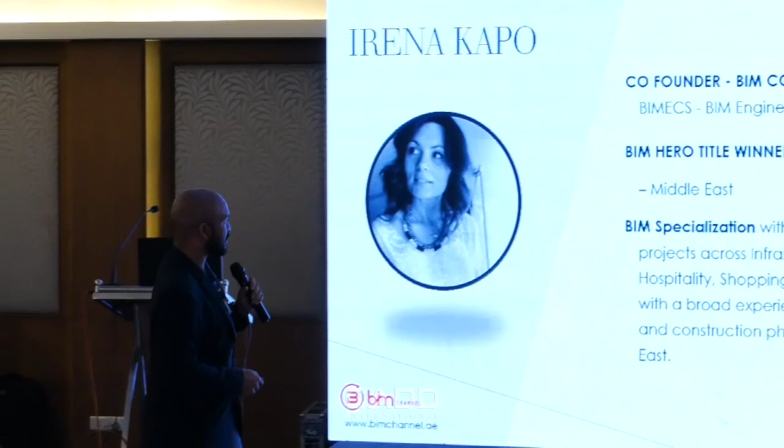As I asked you, what is the concept of BIM? Ma'am clearly explained the practical side of BIM, but still, if you can go for a kind of small definition, everything should have a definition, right? Many people think that BIM is kind of a software. How many of you still think that BIM is a software? Okay, anybody else?

No? Okay, so you know there is a system, right? I have to tell you, this BIM is actually a system, or you can say a process, in order to digitally represent the complete built asset. Built asset means whatever you are going to build - it can be an object, to an extent, to an infrastructure. So BIM doesn't mean it's only focusing on a building; it's connected to infrastructure also. This is one of the big things you have to understand from the beginning. It is a system from the point where the client discusses, the concept stage, concept design happens, detailed design happens, construction starts, as-built happening, handing over, and even after handing over, how the services are managed. All those things are managed through this system called BIM. So please keep in mind, BIM is not a software - it's a holistic process of creating and managing information for a built asset. That is the point. Any questions?

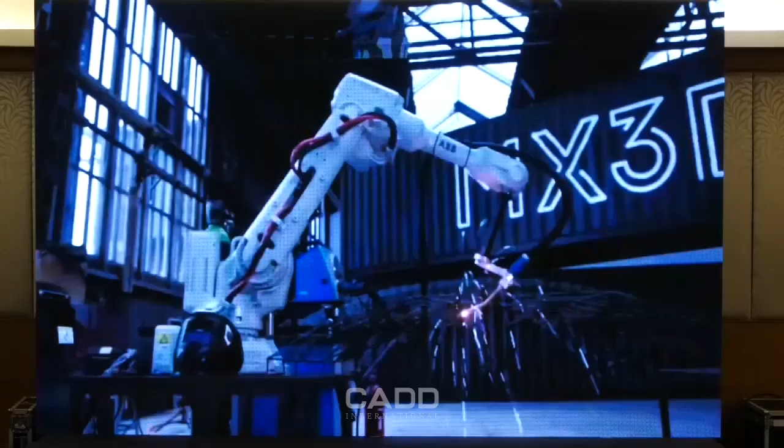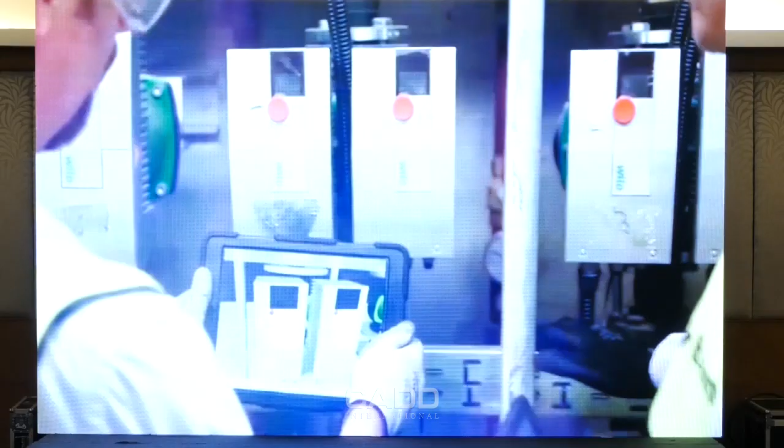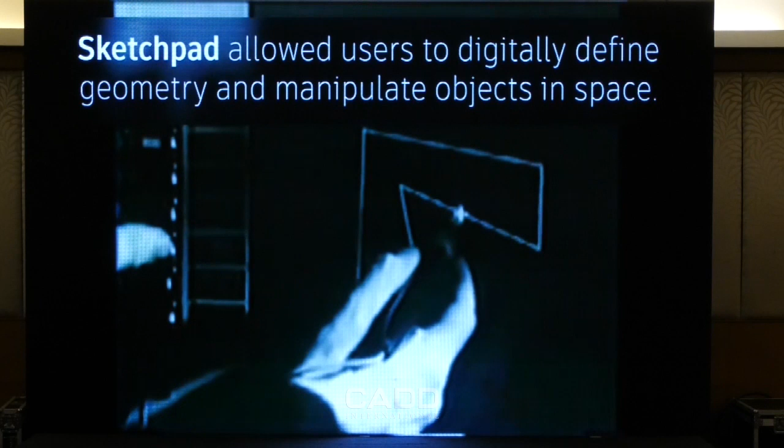So what's the technology behind many of the iconic architectural structures being built today? It's a process called building information modeling. BIM is a 3D modeling process that is changing the way people plan, design, construct, and operate buildings and infrastructure around the globe. As early as the 1960s, computer pioneers realized the demand for flexible digital building models. The breakthrough came in 1963 when Ivan Sutherland developed Sketchpad. This rudimentary application allowed users to define geometry and manipulate objects in space with only the help of an electronic stylus on a computer screen.

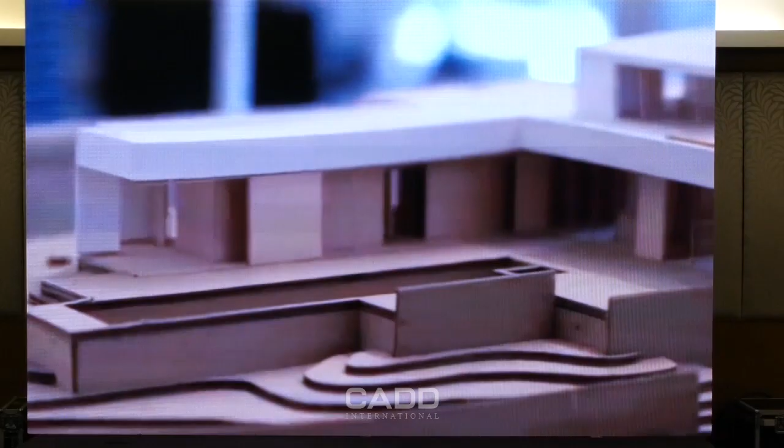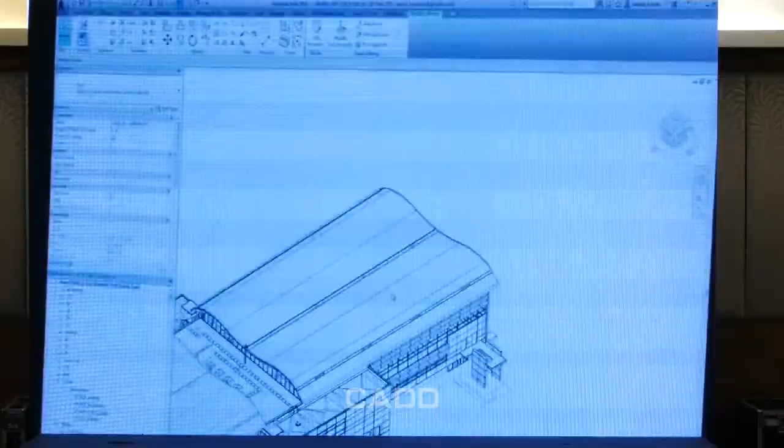However, these early predecessors built models without data on functional performance characteristics, meaning that without information on how buildings work, they were rather superficial implementations. In 1984, these BIM forerunners became available for use on personal computers. But it wasn't until 1986, when Robert Aish coined the phrase building modeling, that early programs were first used on large and complex projects, such as the renovation of a Heathrow Airport terminal. In 1993, the Lawrence Berkeley National Lab's development of Building Design Advisor paved the way for systems providing performance data on how buildings and their components function.

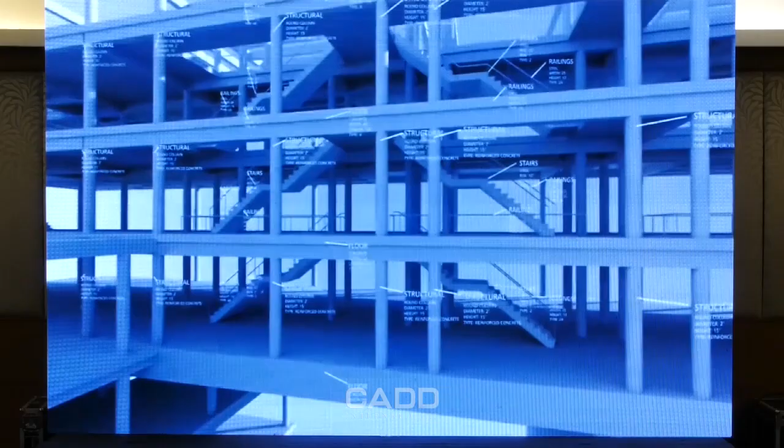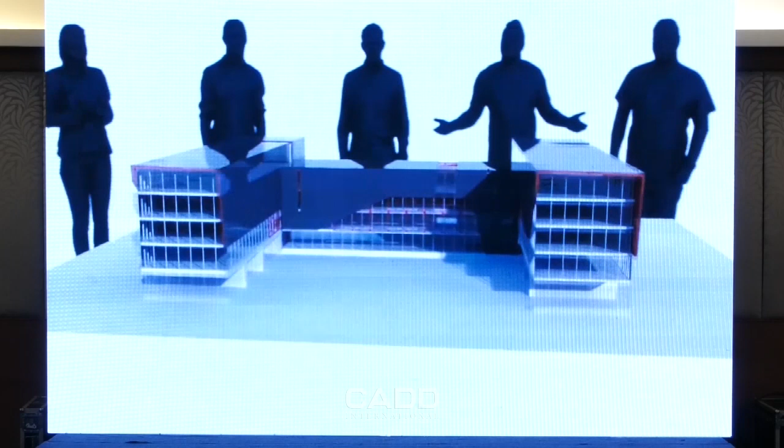By the late 1990s and early 2000s, the contemporary outline of BIM had started to crystallize. Objects and shapes had fully embedded metadata and were able to understand their relationship with each other and the building as a whole. 2004 was a huge year for BIM. For the first time, designers, builders, engineers, and owners could all work collaboratively on one centralized, dynamically updated model. For example, if a designer made a change to the model, the project's construction shopping list automatically changed too, such as the number and size of windows.

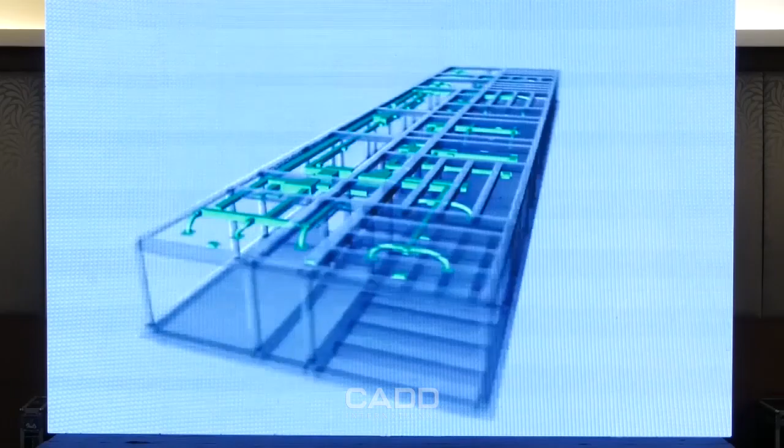2008, four years later, parametric modeling also took a step forward with an avalanche of design outputs, giving users even greater control over their project decisions. Meanwhile, laser scanning and reality capture filled BIM models with precise, abundant data, saving time in project preparations, and clash detection made it possible to automatically locate on-site clashes, such as ductwork running through beams, and prevent expensive change orders. With help from clash detection, engineers for the China Zun Tower in Beijing caught thousands of issues in the BIM model. It reduced passive change orders by 80% compared to other similar projects.

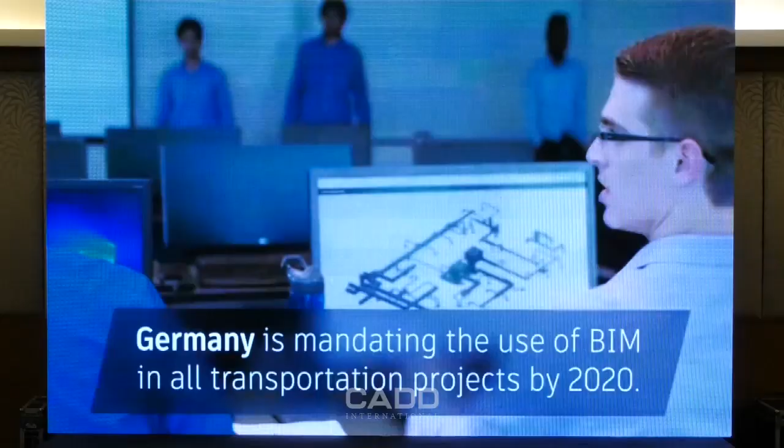The indisputable efficiencies in time, material, and cost driven by BIM meant that in 2016, the UK became the leader in legally mandating that all public-funded building projects must use BIM. And other countries are soon following suit. By 2020, Germany is mandating BIM for all transportation projects. With BIM now in the cloud, teams can collaborate on the same model from all over the world, providing great efficiencies. In the near future, BIM and GIS data will merge into one model, helping designers make crucial decisions based on the precise geographic location.

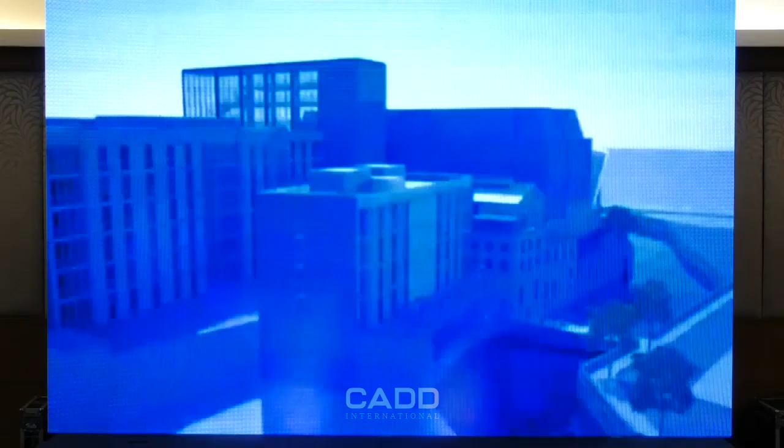As 3D modeling technology advances and is more commercially accessible, the BIM process is becoming more and more integrated with building the wider world, promising a richer, more collaborative experience for users designing and building the spaces we live and work in.

So this is a quick, short history of how we reached now. What we need to understand is that through all these videos, we have seen many technologies, many systems come up. And now everywhere the issue or problem is how to solve the issues - we can call it a mitigation strategy that needs to be planned. Even whatever role you are playing in a project, sometimes you may be a lead architect, sometimes you may be a project manager, sometimes anything.

Whatever role you are playing, you should have a proper mitigation strategy. That is the role of a proper manager in this BIM system. So there arises the level of a BIM manager for a project, which is the highest position we can assume in a BIM-based project.

What I have to tell you is that even in manual drafting we have Sketchpad, AutoCAD, and even ArchiCAD, Revit, and some 3D modeling software like SketchUp, 3ds Max. So I have a question: do we have to connect 3ds Max and SketchUp with BIM? Yes? Why? Can somebody give a mic? What is the role of SketchUp and 3ds Max in BIM? Because normally we know these are just 3D modeling software, right?

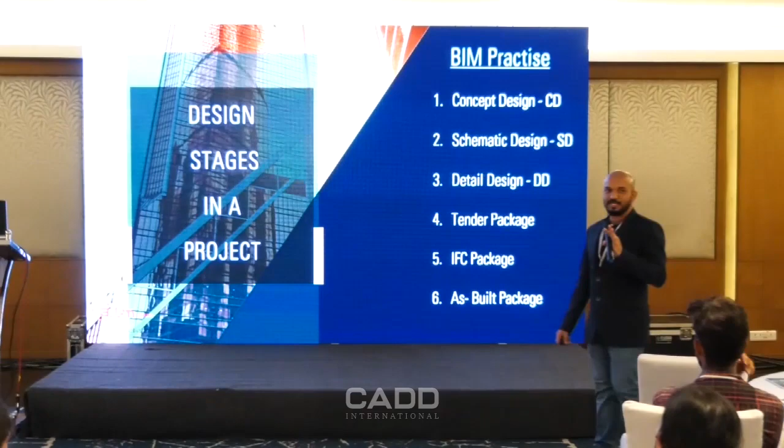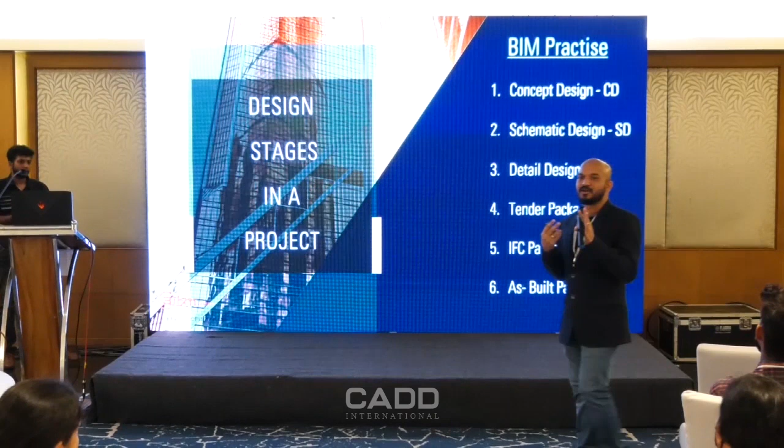So even this is what being practiced in the projects. Most projects, I guess, this is the way in real projects as well. So the point is, concept design stage is the first. Say for example, 100 days is the stage of the project. Say for example, first 20 days are given for concept design.

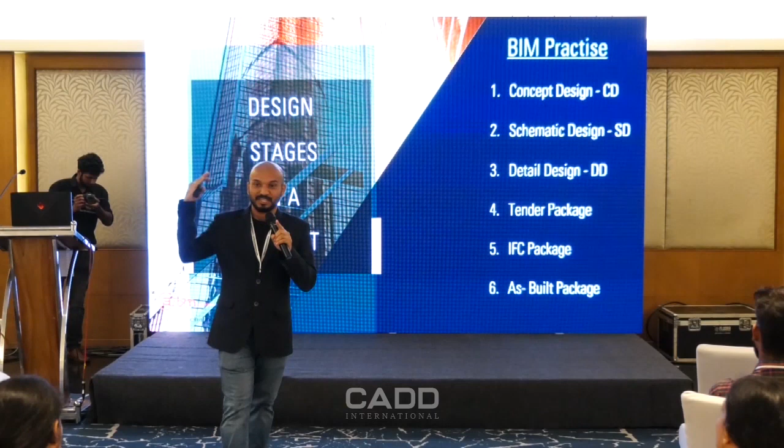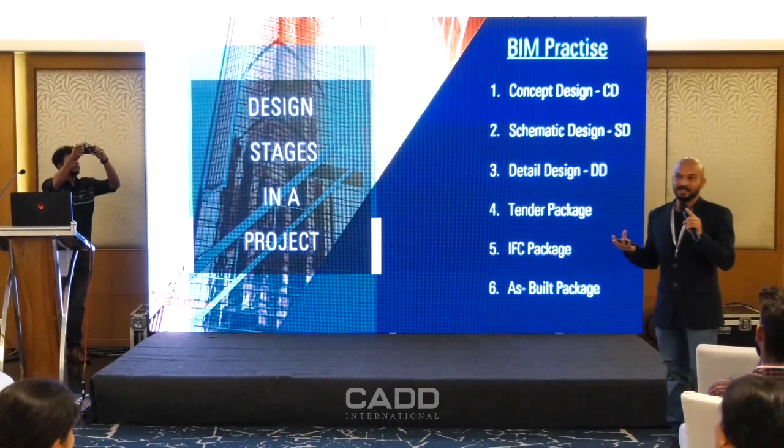So that concept design is not only the role of an architect. That is the reality, what you can say. Even in the concept stage, we need to bring the structural team, MEP guys, lighting, kitchen equipment people, everybody should be on board. And they should prepare a proper plan at the design stage itself. Because in a massive project, it is not only lying in the hands of an architect. Obviously concept is important, services are important, as we see, even the form should follow the function, right? So the functionality is the important thing here. So from the concept stage, everybody will be coming onto the board.

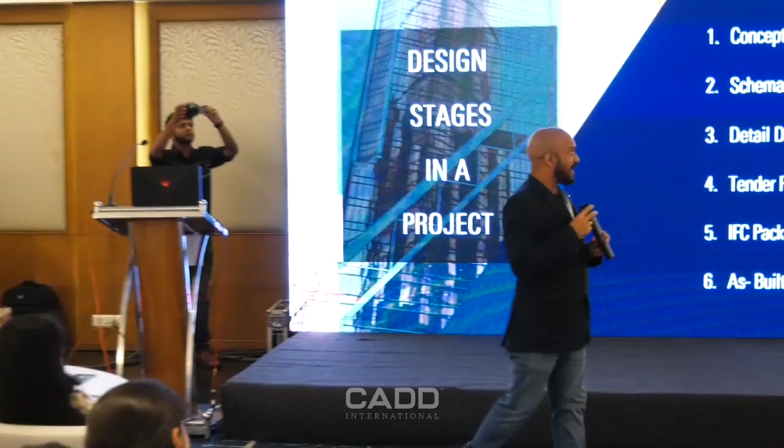And once the concept is approved from the client, obviously for big projects you will be having two phases, like 50% SD and 100% SD. So there we have to deliver the projects based upon the basic information. Say for example, the concept model, it should not be in SketchUp. It should be in Revit.

Or at least the base framework should be in SketchUp. That is totally fine. At the time of discussions with the PowerPoint presentation to the clients, it's okay. But when it comes to the detailed presentations, we need to deliver that in Revit only. So that is the importance of Revit software.

So even that same Revit is being linked on a live basis with MEP and structure teams through the cloud platform called Autodesk BIM Collaborate Pro. It was older, it was BIM 360. Now it is Autodesk BIM Collaborate Pro. We call it ABC Pro. We have planned for a live demonstration in the next session for that one.

The point is, when it comes to concept design, the client will be also there in this BIM 360 platform or BIM Collaborate Pro platform. So even the client can see what is happening in the design, in all the cases. And also the client side will be having the BIM team. So what they will do is just cross-verify what the consultants are delivering.

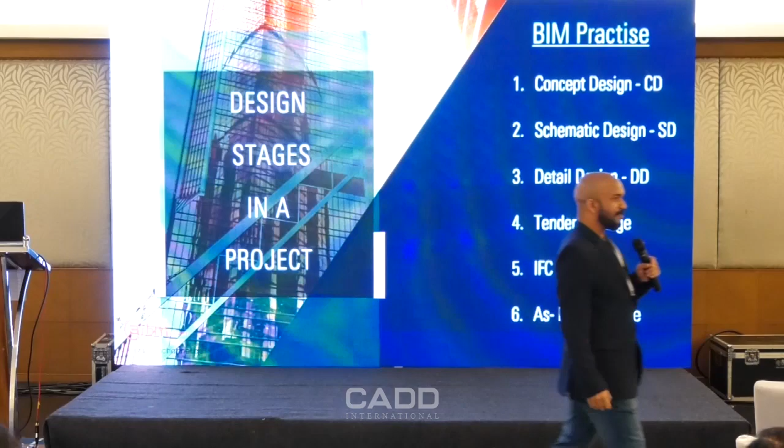Preliminary analysis based on structural as well as general operational analysis is carried out at the schematic stage, and the landscape team adds in, landscape services come in, and entire collaboration happens there. So in the schematic stage, everyone should deliver the deliverables - architects, structural engineers, MEP engineers, and even specialty equipment teams should come into action there.

And that comes in 50% and 100% stages, and you have to submit both drawings and BIM models. So I have a question - we know BIM is actually a model, right? So what is the relevance of drawings now, because everything is available in the Revit model. Is drawings necessary or not?

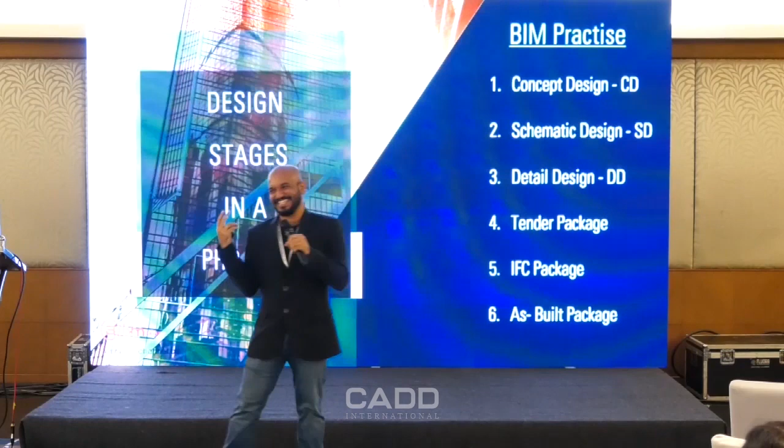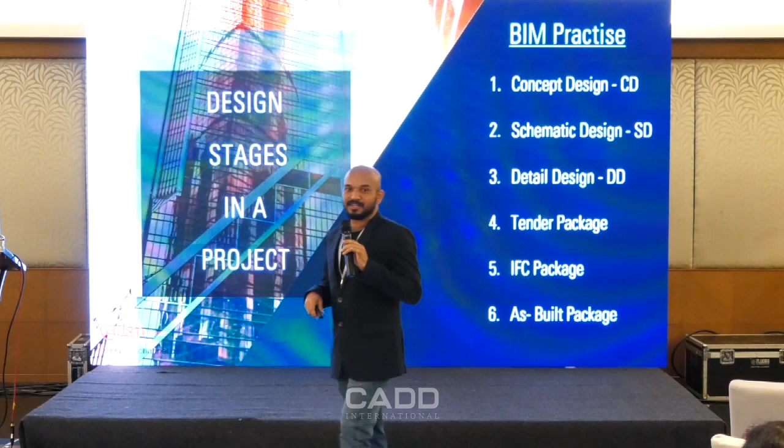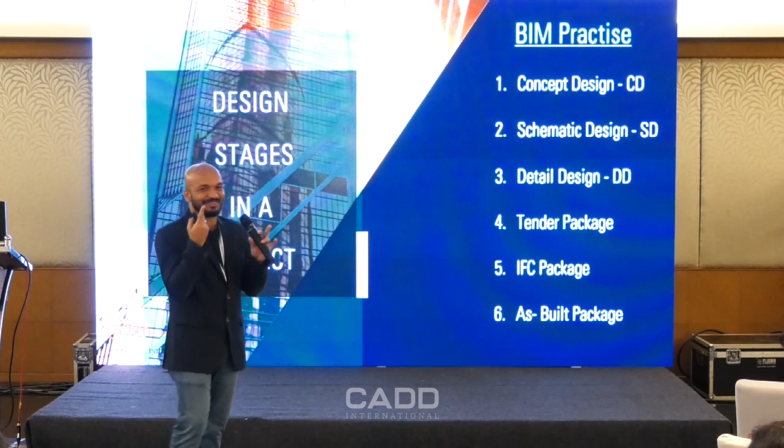Obviously, you will kill me. Drawings are very important, because even though we do the Revit model as the deliverable, we need to get the drawings. Execution is the most challenging part, so for execution we need the drawings. Nobody will go into the Revit model directly - that's not practical. So the point is, in the BIM system, BIM insists you develop the model first and then extract the 2D drawing.

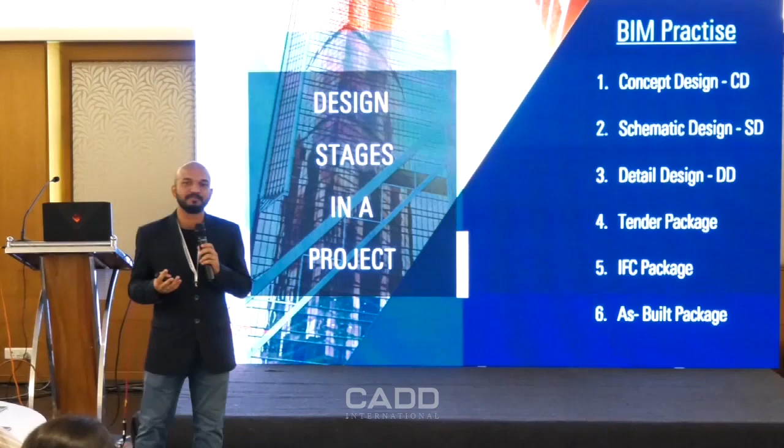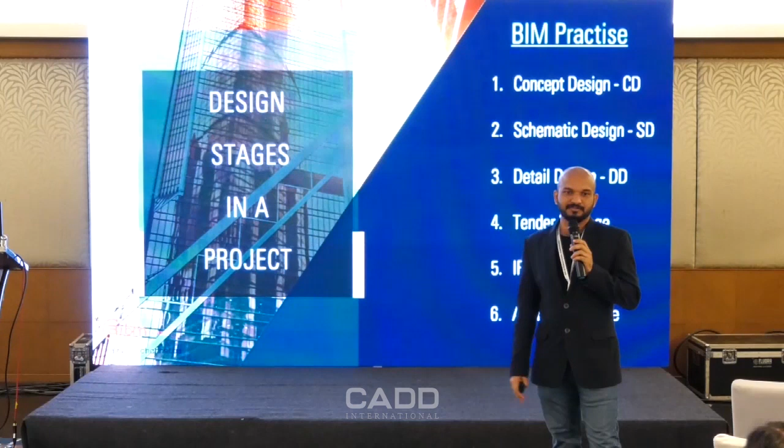But in 90% of projects, it's happening in reverse. Why? Because most companies have very limited Revit experts. So in that scenario, the company fails to deliver on the date - submission delays happen, and the client will pressurize you, so you need to find any way to get the deliverables done on time.

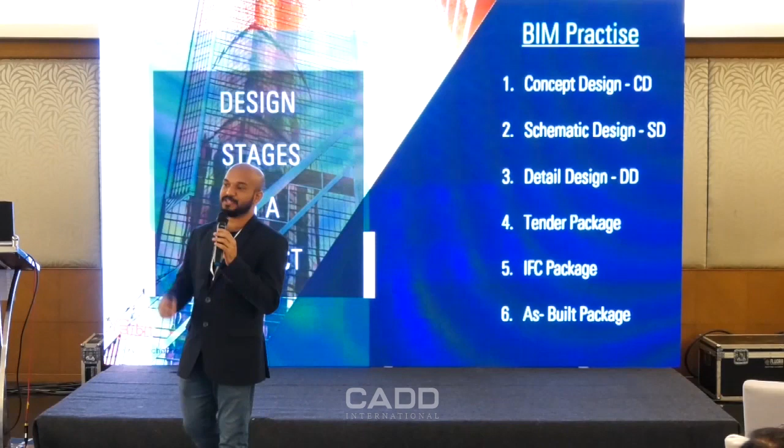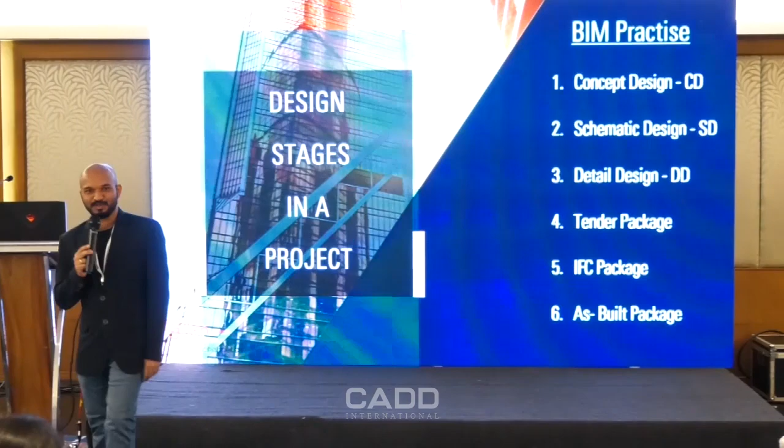So even you will follow AutoCAD. Most people have 20-plus years of experience, so they're fluent in AutoCAD, but for people inexperienced in Revit, it takes a little more time - errors will be there, and managing those errors is quite complicated. That's why most architects, not only architects but most professionals, have a point that Revit is a waste. I know this will also be a controversy, but that's the reality.

Even in the project I'm handling now, we have a discussion - SD 100% is happening now, this November is the coming submission date. So in that one, the ID team is coming into action - the interior designing team has come on board. ID BIM modeling and ID BIM drawings have a big difference. You can draft anything, create sections, create all those 2D drafts.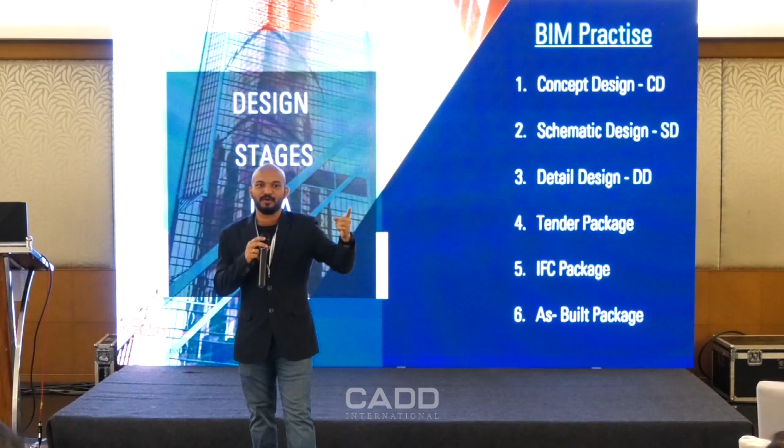That's very easy, and manipulation is easy with AutoCAD - you can do anything. But in Revit that's not as easy, because in Revit we call it 'change anywhere as change everywhere.' If you change here in the plan view, it will affect the elevation, section, 3D everywhere. But in the drawing, that's not the case - if you change the drawing, it only affects that PDF paper since it's already 2D, so it won't affect your other design. That's what we need to understand.

That's where the role of BIM experts comes in - we have to think a little bit outside the box with Revit. You've heard about a plugin called Dynamo. Dynamo is a visual programming plugin which we use to make such activities much simpler. So just Revit alone will not work.

You have to find solutions by using additional external plugins like Dynamo. Dynamo is one of the best tools, and Python is the base language of Dynamo. Even though it's completely visual programming, you still have to think logically to get to a result, and that's the scenario with Dynamo. All those things come into action.

That's what I'm telling you, even ID teams find it very difficult to deliver the BIM SD 100% model. Why? Because even for ID, for example, if you have claddings, the fixation methods are totally different. Sometimes you'll have metal studs, sometimes plastering, sometimes pasted cladding. Different methods exist for installation.

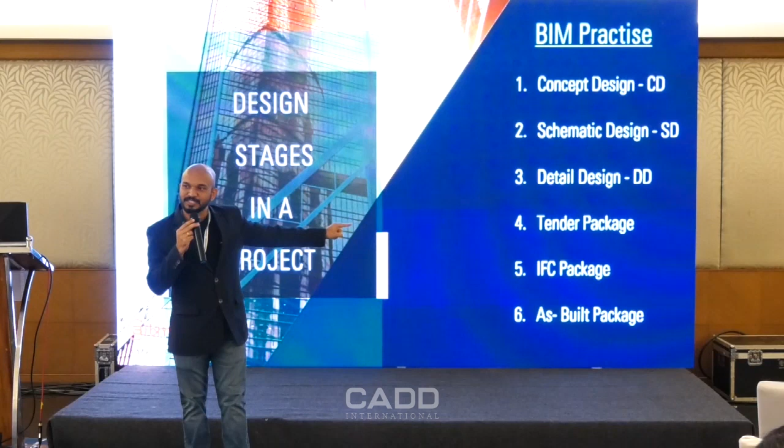So even at SD, or in the Revit model, the client expects all those details. As mentioned, for tendering, I specified number 4 as the tender package. When it comes to the tender package, it's very messy. You have to refer to the model from the previous stages up to tender, and all those things are calculated at that level. That is the point.

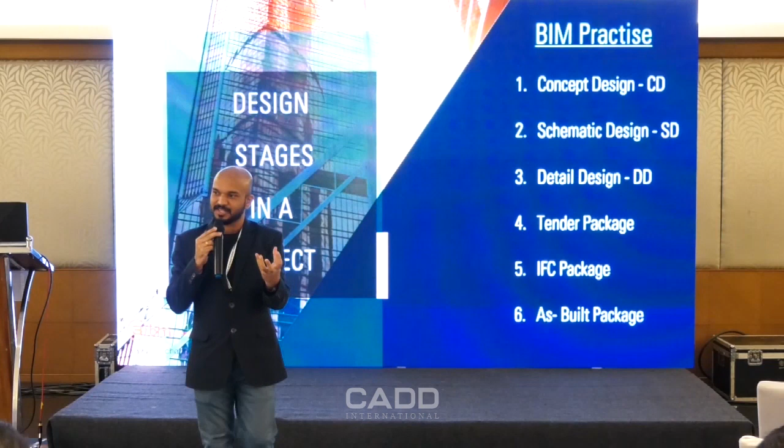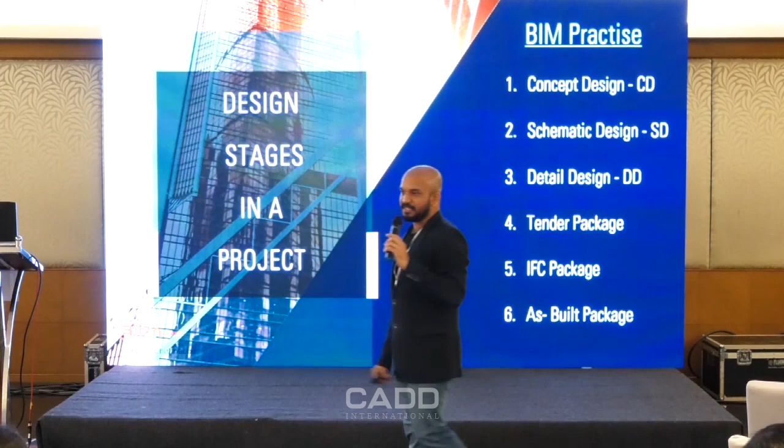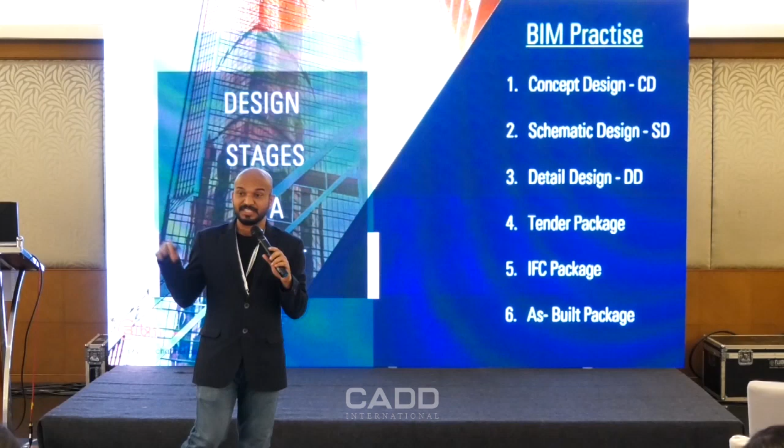So that is the point. Now schematic design comes in that way, and then detailing comes. Detailed design comes, and once the detailed design includes each and every joinery and even material detailing, material texture detailing, there's much more detail there.

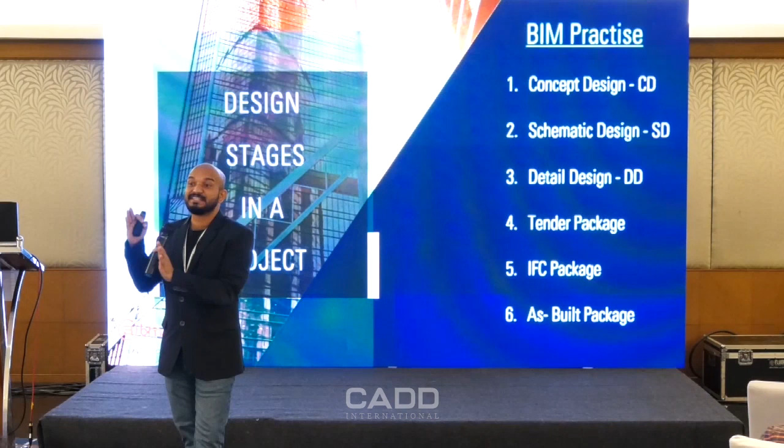Once the DD model is done, we have to take that model to the tendering side. So the point is, what we have done till now is only design wise, nothing else - it's all consultant activities. Once the detailed design happens, you should take this model to take up the quantities for tendering. There comes the role of a contractor. So in real projects, now only the contractor comes into action.

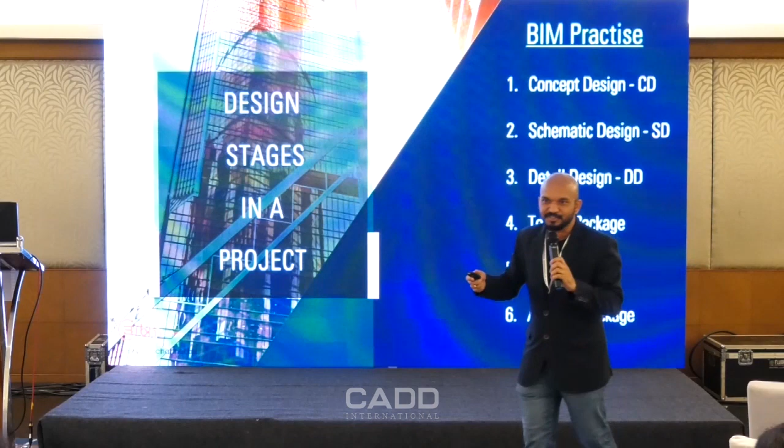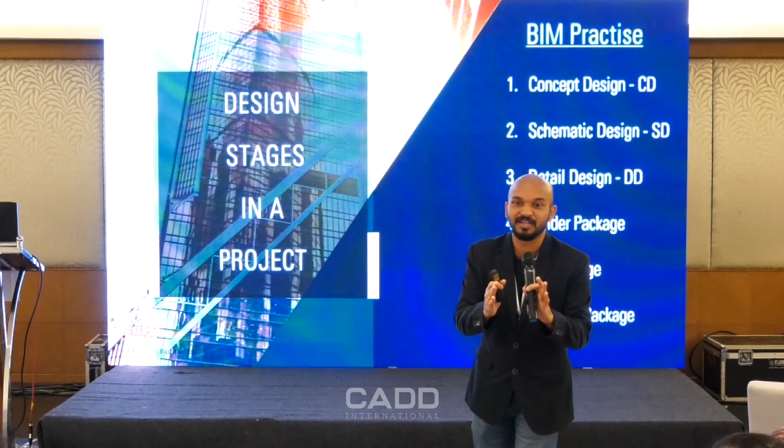So what happens is the contractor will refer to the BIM model developed by the consultants till the DD stage. They will check material availability and then cross-check how it is happening - is it practically possible or not, or is the design just a kind of fantasy versus a real design? They will compare with practical availability, and finally they will also submit a BIM model for the tendering package with quantities.

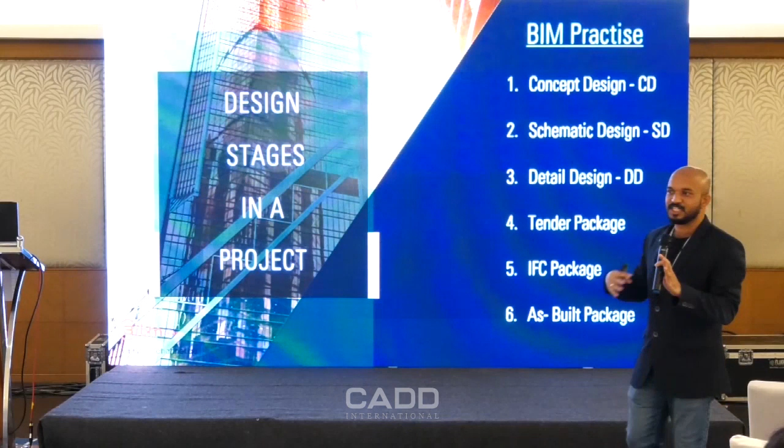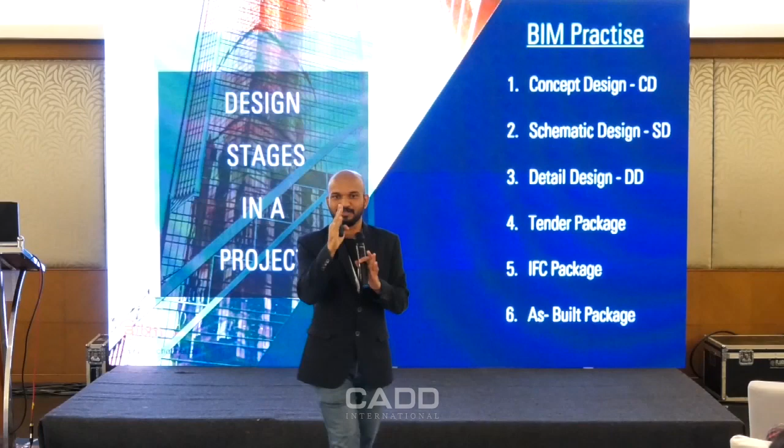Once these two things are ready, the tendering package is open and bidding happens. Many people will come into the board, and we - meaning the client, the PMC - have to finalize one particular team to check everything, quality, and many other things. Once it's okay, you have to issue an IFC package.

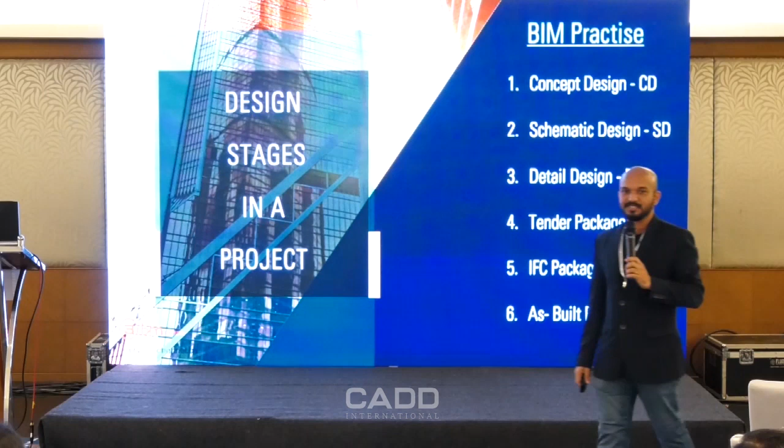IFC packages, you know, right? Issued For Construction. Earlier it was all drawings, but right now we have to issue the IFC models. IFC packages are coming in Revit models as well.

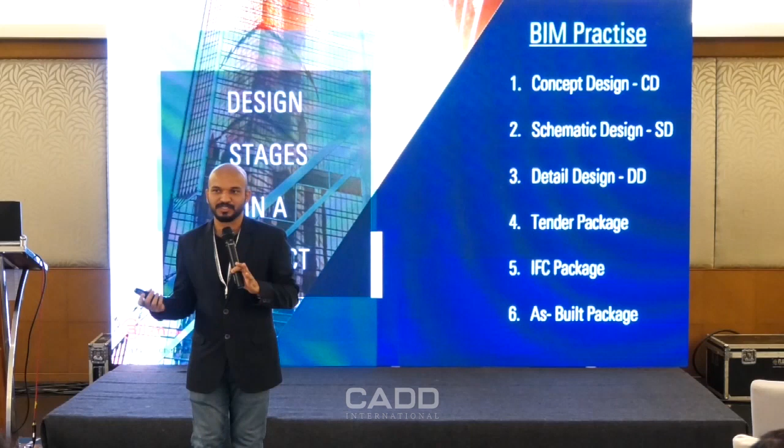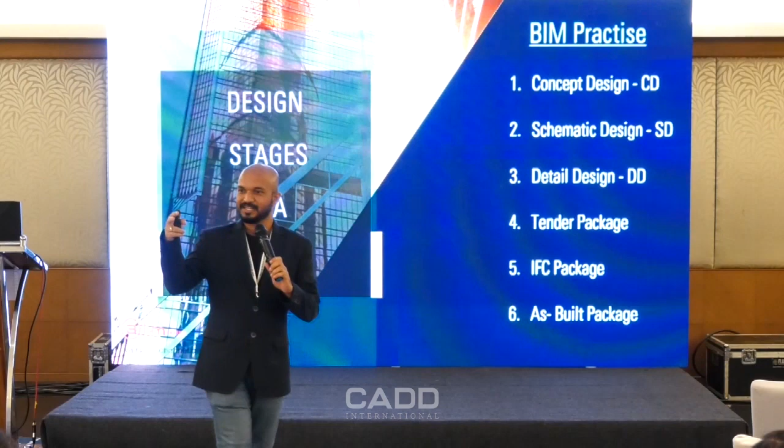So everyone focus - hope you are not getting bored, right? A little bit? Okay fine, water is available, please get relaxed.

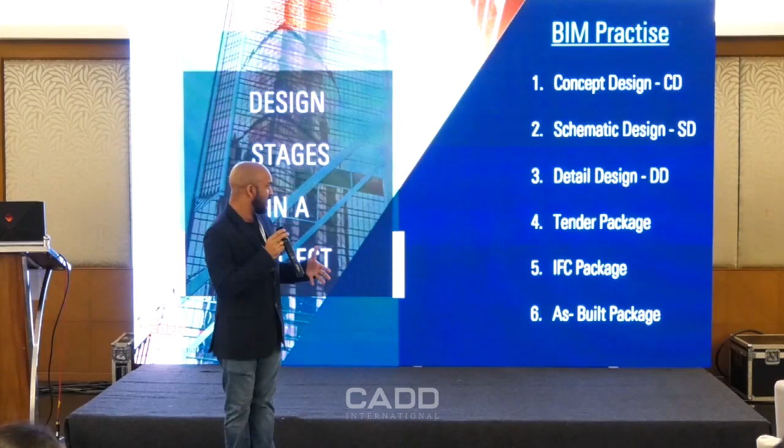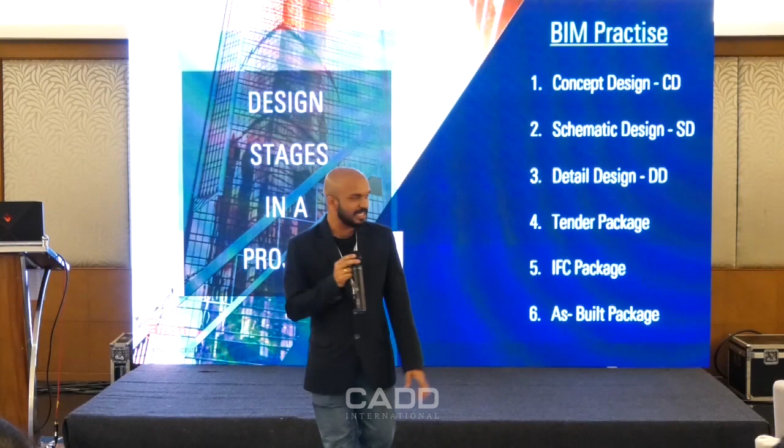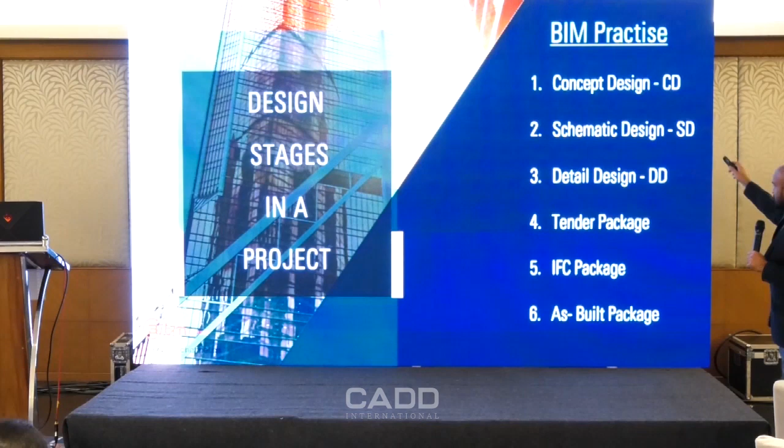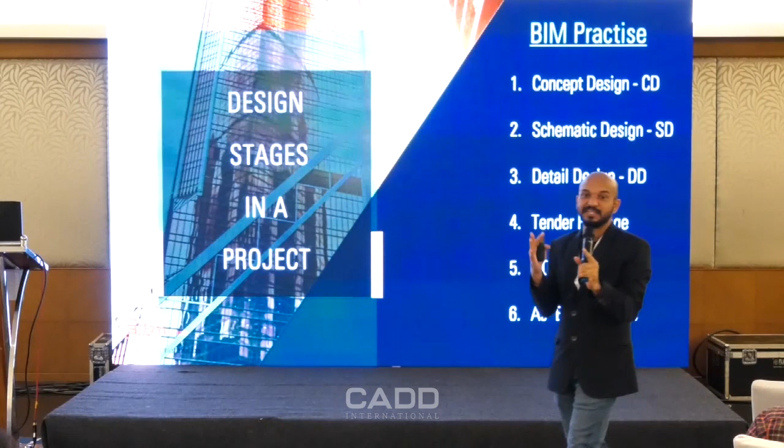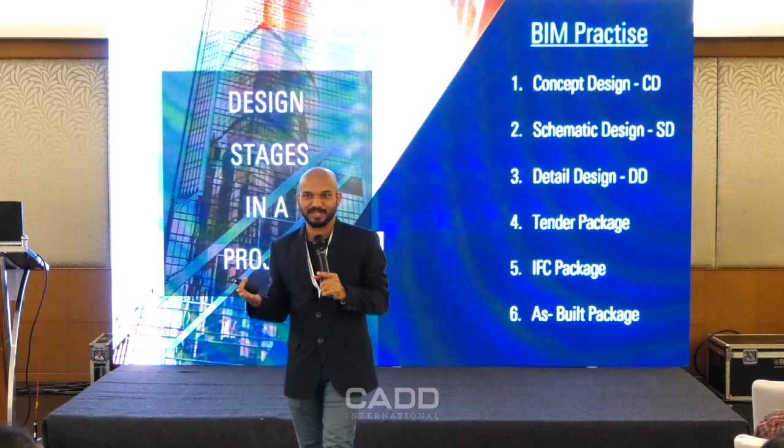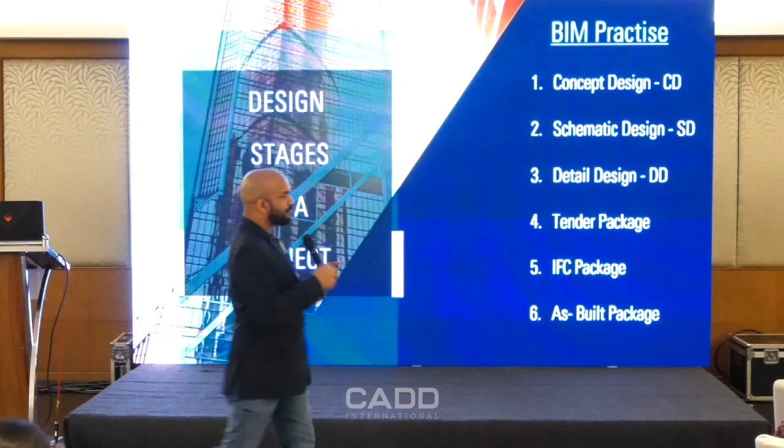I have to tell you something - these first two phases are okay, up to schematic design it's fine. But from detailed design onwards, sometimes it joins together - DD and tendering can happen together, quantities together, it can happen depending upon the project. Obviously this is the general strategy, but in some projects it may vary, depending upon the project scope, availability, and country-based operations which can be totally different. So this is the BIM practice of handling a project in different stages.

And now I have to tell you something - we have to coin a term called Level of Development. Level of Development is there, and Level of Detailing is there.

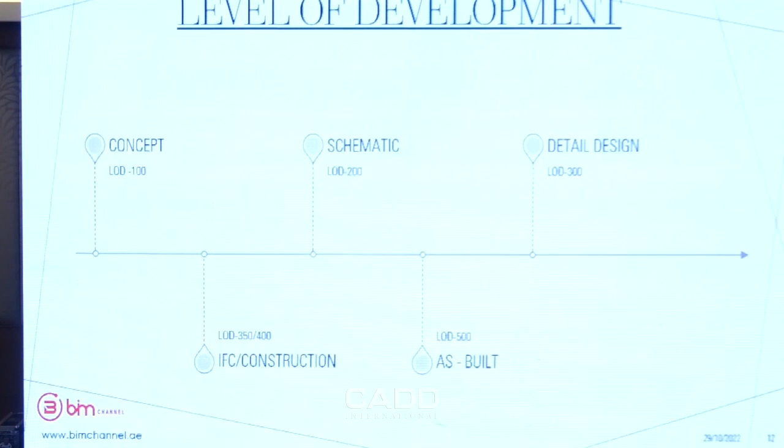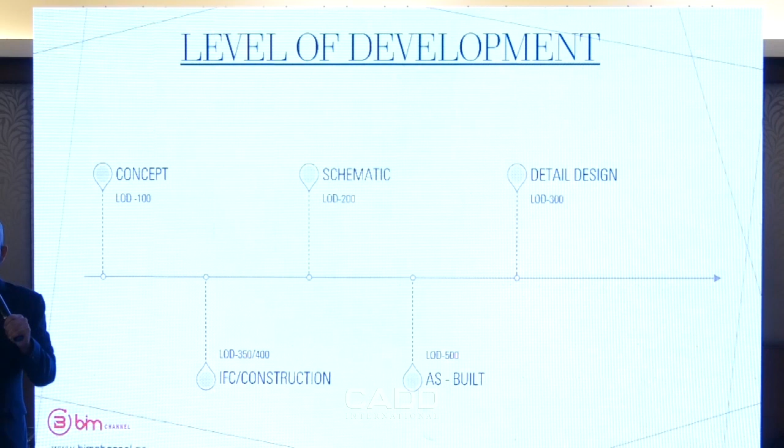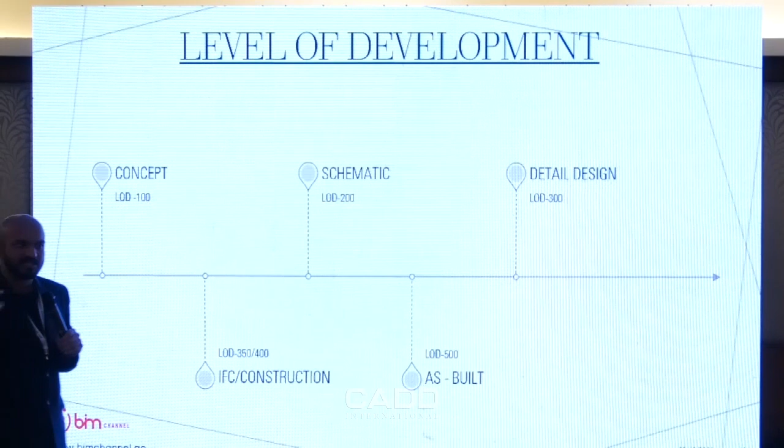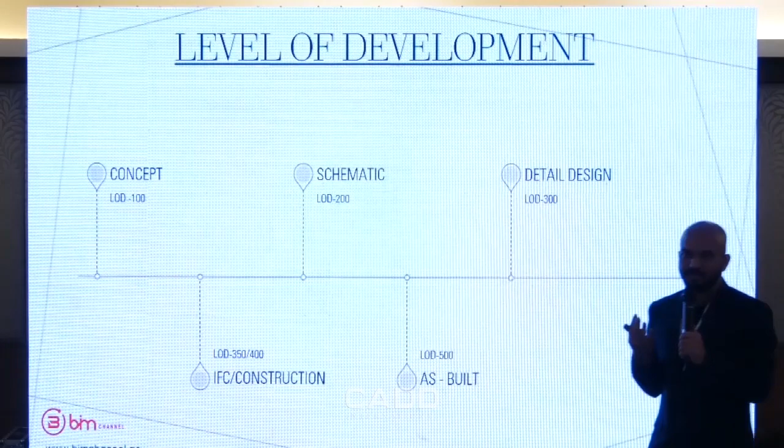Even when a project starts, the level of development starts from the concept stage, which we call LOD 100. LOD, level of development stage 100, means it's all about the concept stage. So if you're engaged in a BIM project and come across the term LOD, understand that LOD means level of development when considering a project as a whole.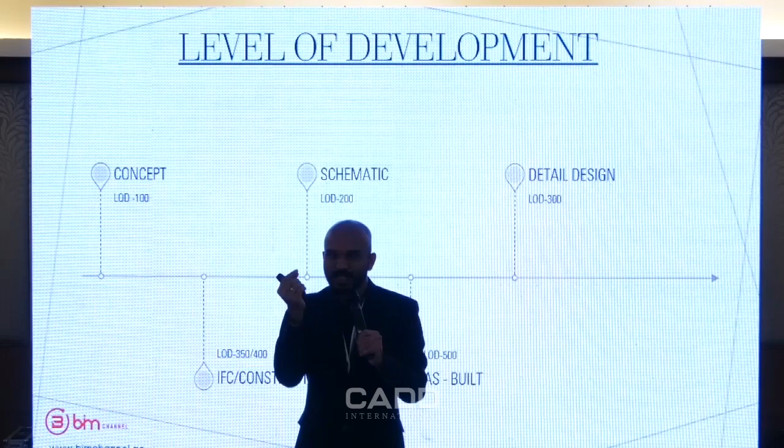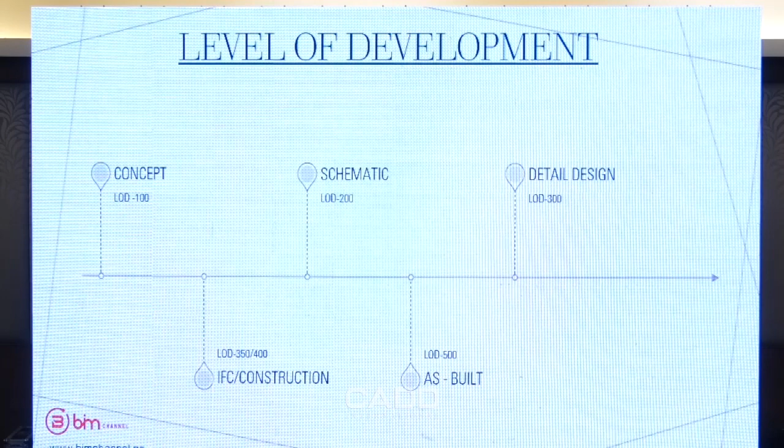If you are considering an object, say the ID package of this conference room is our scope, we have to focus even there. Say this chair is our project. Obviously this chair can be our project, right? So the chair's LOD represents level of detail - up to what detail you have to model an entity in the project.

So both are different. A Revit modeler's scope is to understand level of detail only - how much detail should be in the modeled object. But if considering the project at a bigger scale, you have to understand level of development, where the project starts from concept, schematic, detail, IFC or construction, and as-built. So it starts from 100, then 200, then 300, 350, and 400 is like IFC and construction, a kind of combination.

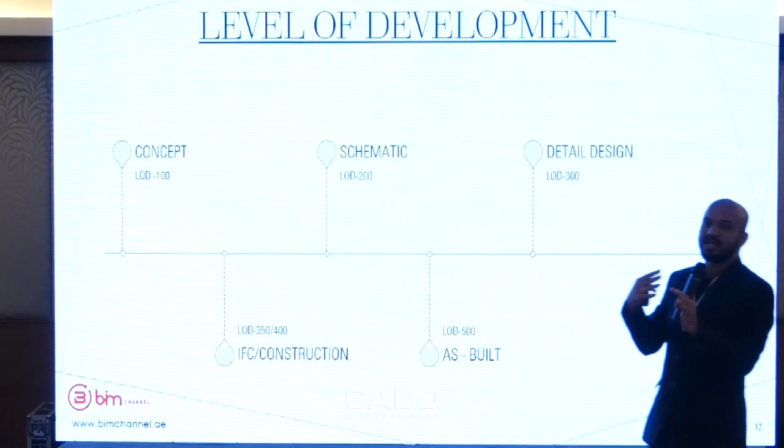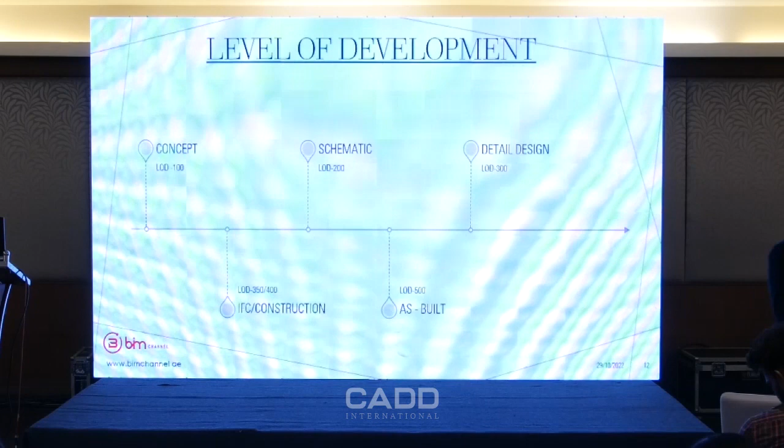The BIM manager can decide how detailed we should have it. Then finally, once it comes to the next stage, you can even go for as-built, LOD 500. So LOD 500 represents, it's all about as-built only.

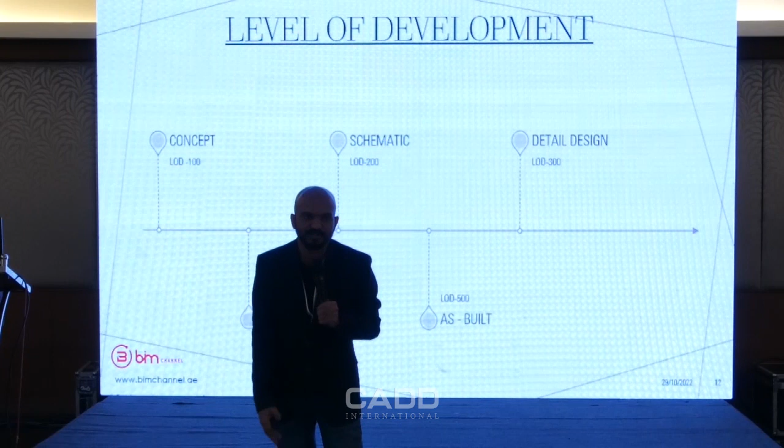When you come to a project in BIM, obviously Revit will be there. Sometimes you might be a reviewer, sometimes you might be the person working on the model. So just understand what all things need to be added into each LOD stage.

If you can note down, please note one term called LOIN, level of information need. It is actually a set of documents which defines how much detail should be there in each and every package. I'll show you a file for that, but it's actually confidential, so I'll show you after the session.

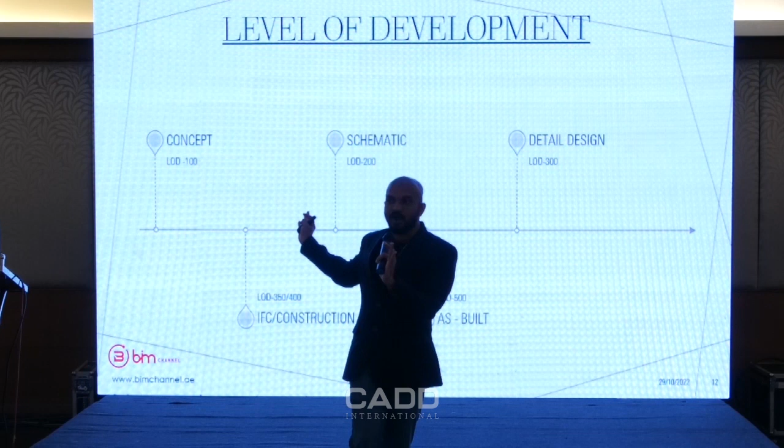In that document, the BIM manager is responsible for defining how much detail you should show at each and every stage. Say, for example, the wall - if we consider the wall alone, in LOD 100 what all things need to be added in the wall, in LOD 200 what all things need to be added in the wall. So up to as-built, there is a standard procedure that we have to follow in BIM.

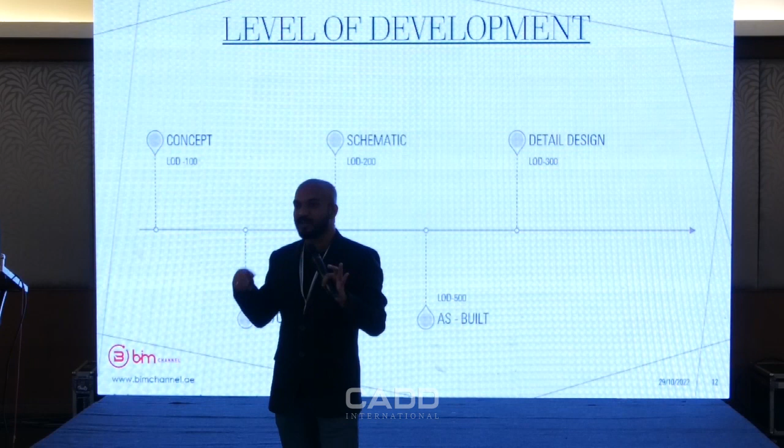That's why I'm telling you BIM is not just 3D modeling. In 3ds Max modeling and such, it is easy - you can just show something, it's only visual. But here it comes to the detailing also. So visual is important along with the detail. That is the concept of level of development.

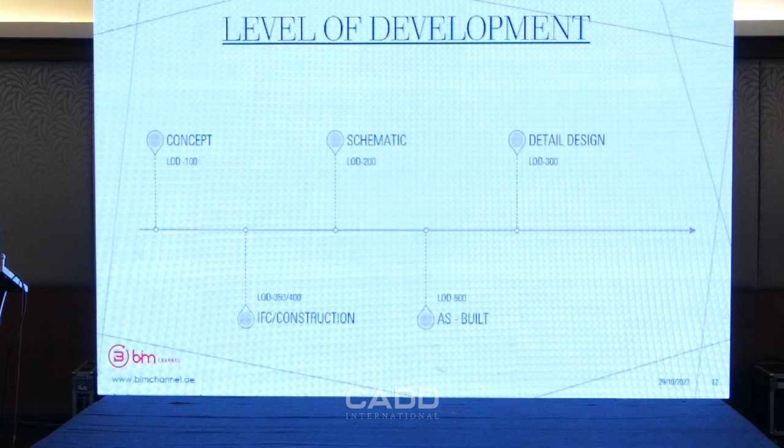If you can see some more detailed explanation of what I've told you now, please go through those words there. Meanwhile, I'll have a small drink.

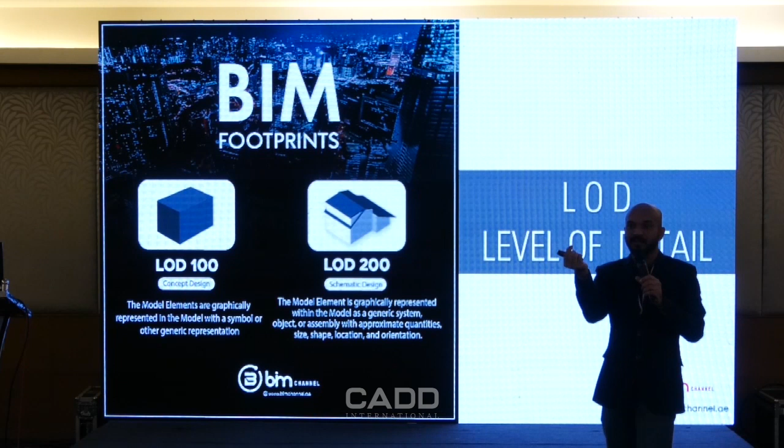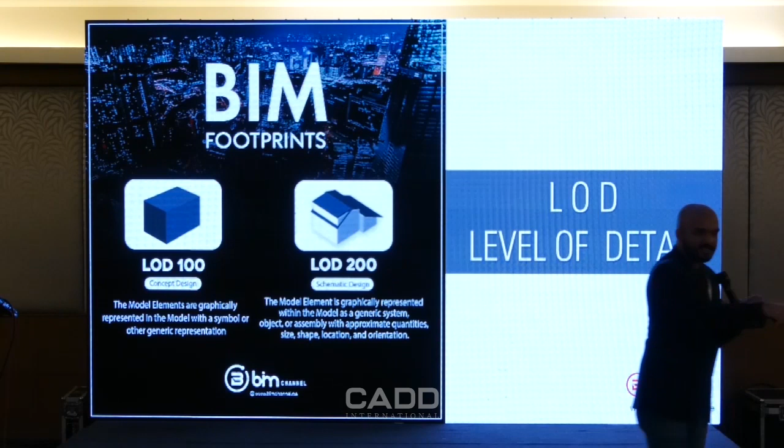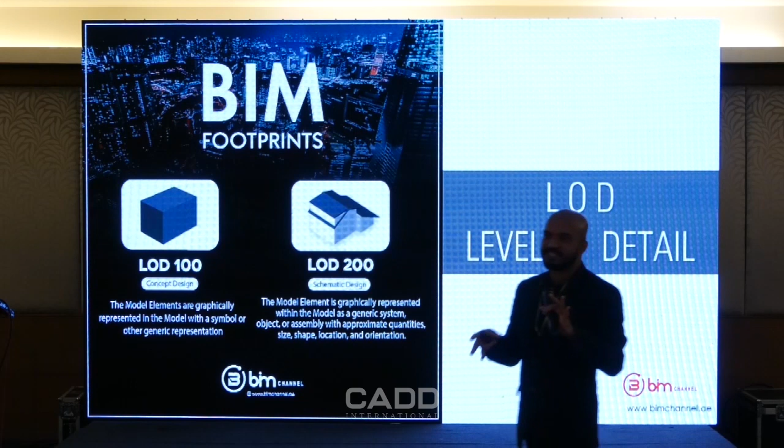Concept design, schematic - please read it. Model elements are graphically represented in the model with a symbol or other generic component. If you are developing a conceptual model, sometimes a dot can represent many things, and a BIM-based person will know that dot represents this. Sometimes if you want to represent this table, it will just be a cylinder - you need not show the leg and everything, just a cylinder, like a placeholder, indicating that something is there. It's the normal design procedure itself, just given another name, another definition digitally, that's it.

And then schematic, you can see. I would like to see the difference between each stage. In LOD 100, you can find almost similar sentences, but a small difference will be there. So please focus on that text in detail.